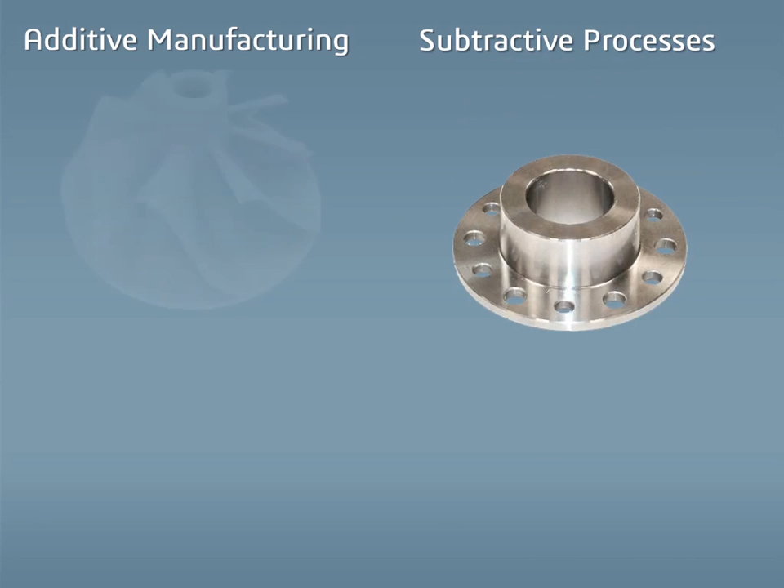Additive manufacturing is changing the mindset of how parts are created. While most manufacturing processes have focused on a subtractive process, which removes material from an existing block, an additive process only uses material to make up the part geometry. This means significantly less material is wasted, the cost of manufacturing goes down, and the part is generated immediately in its final shape.

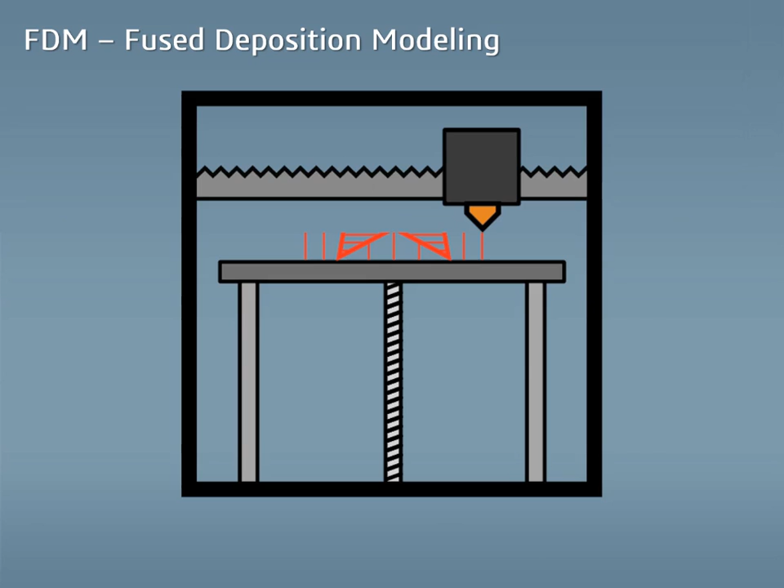There are a couple additive manufacturing methods leading the industry. The most common type is called fused deposition modeling, or FDM. In this process, a strand of plastic material is pushed through a heated nozzle. That nozzle moves in a programmed pattern, placing the heated plastic strand in the shape of a single layer of the part. These layers stack on top of one another until the entire part is printed.

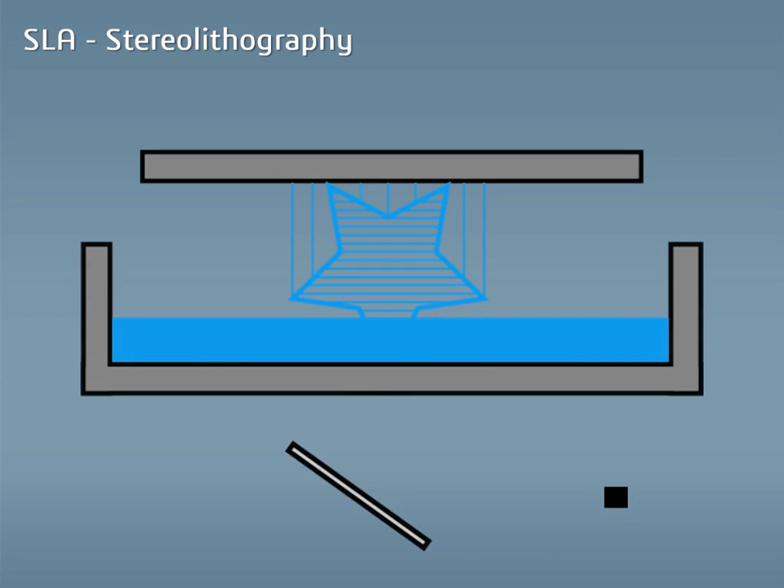Another common method is called stereolithography, or SLA. In this process, a pool of liquid resin is heated to a specific temperature, and then a laser moves throughout the liquid and hardens the resin at the point of contact. This laser moves in the pattern of a single layer of the part, and then the machine adjusts and moves on to the next layer.

There are several other additive manufacturing processes out there. Many of these use a powder-based system that polymerizes the powder and forms a solid. While this process can make much higher quality parts, along with the ability to print metal, it's a much more complex process and requires additional cleanup and post-processing.

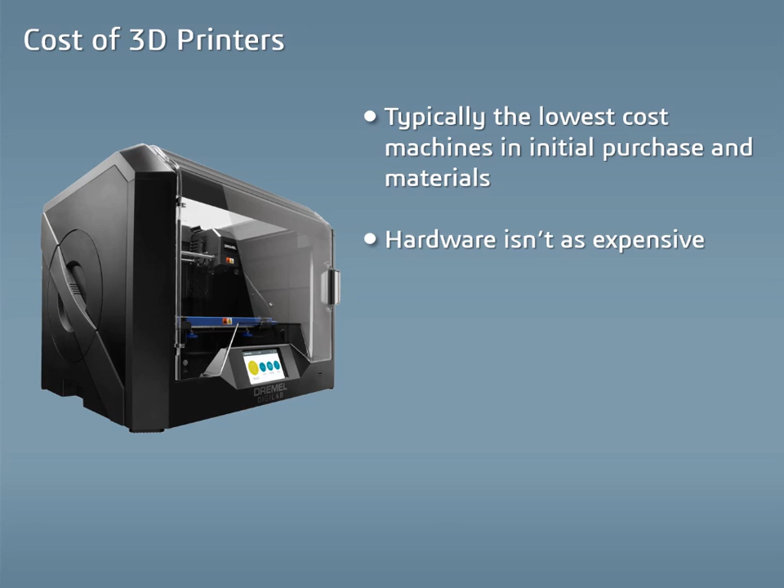While these processes are all revolutionizing the way parts are manufactured, the cost of buying a machine and printing parts varies between them. FDM printers are typically the lowest cost machines, both in initial purchase and material. The hardware that makes up FDM printing machines isn't nearly as expensive as other machines that use a projected laser. In addition, the spools of plastic strands used by FDM printers are widely available and created at a low cost. So if you're wanting to get started with your own printer, this can be the cheapest option to get going.

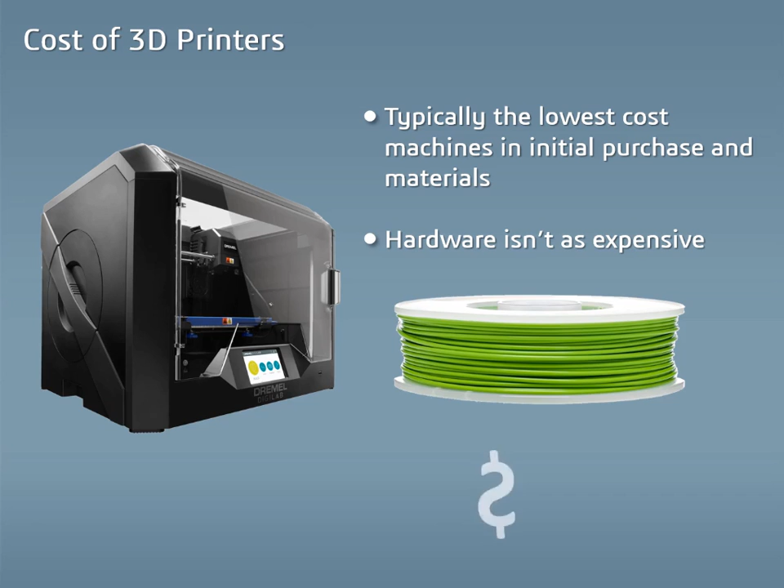SLA printers are more expensive than FDM printers, however, they often come in a smaller footprint and are available in desktop sizes. This means they aren't nearly as expensive as the other powder-based printers, which use a more complex process with high-end components and are much larger dimensionally. However, SLA printers are making a strong push in the 3D printing market and are coming to a more competitive price point with FDM printers.

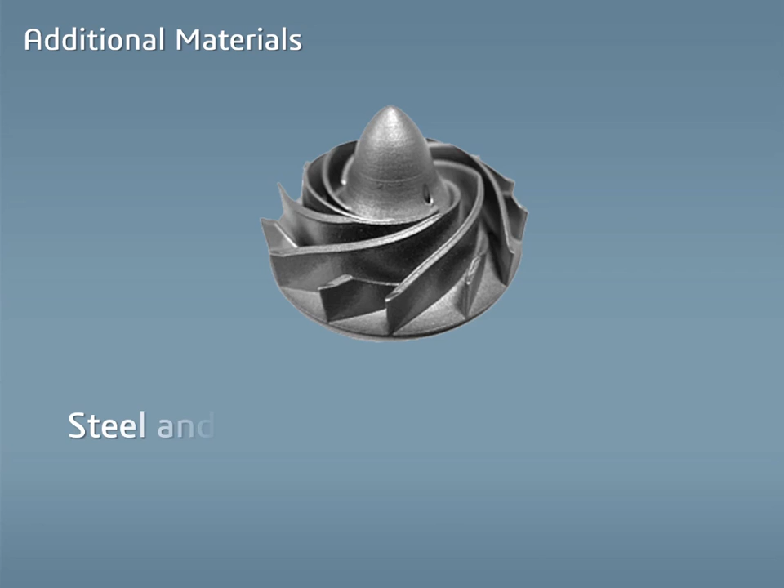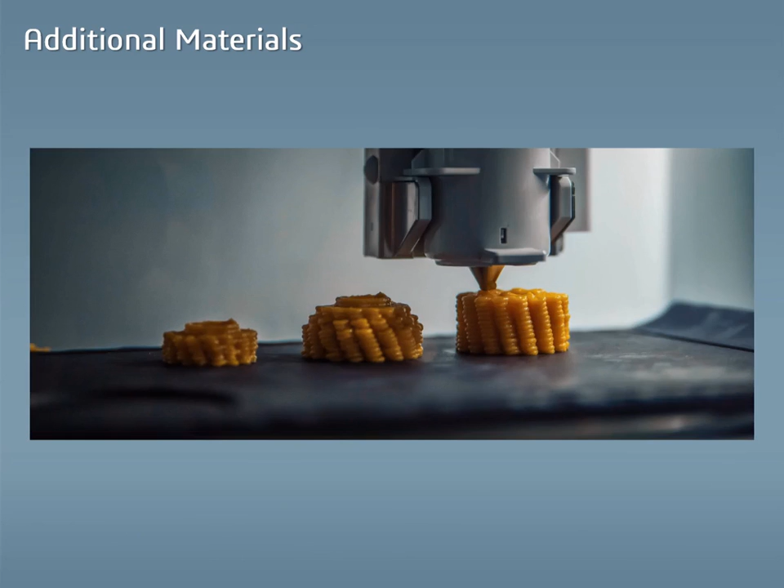As mentioned, 3D printing technology is continually expanding and is able to print materials other than plastic. Metals such as steel and aluminum are some of the materials in highest demand. However, there are other materials that can have a tremendous impact. Medical industries are now able to print biomaterials such as skin cells, organ cells, and even dissolving implants. This could revolutionize healthcare and the procedures available to those in need. Even peripheral industries like the restaurant and culinary industry are benefiting from the ability to print food from a machine.

While the possibilities of 3D printing aren't slowing down anytime soon, it's important to know how the technology works so that your prints are successful, high-quality products. In the following lessons, you'll learn more about the technical details of the machine and the best practices for printing your parts.